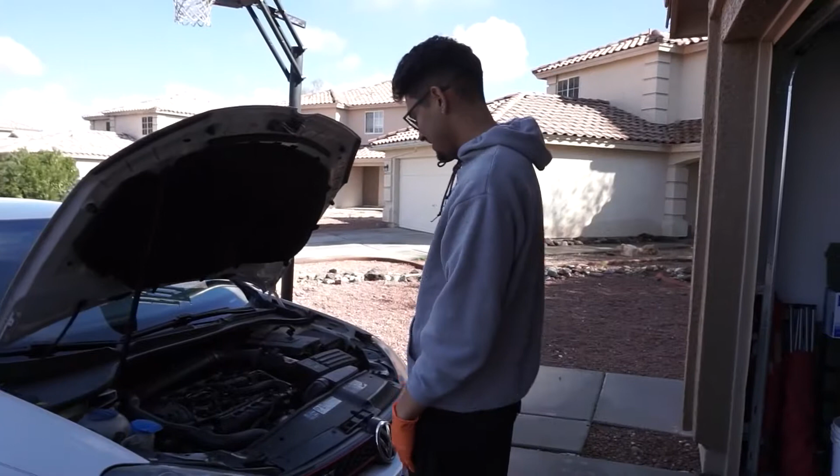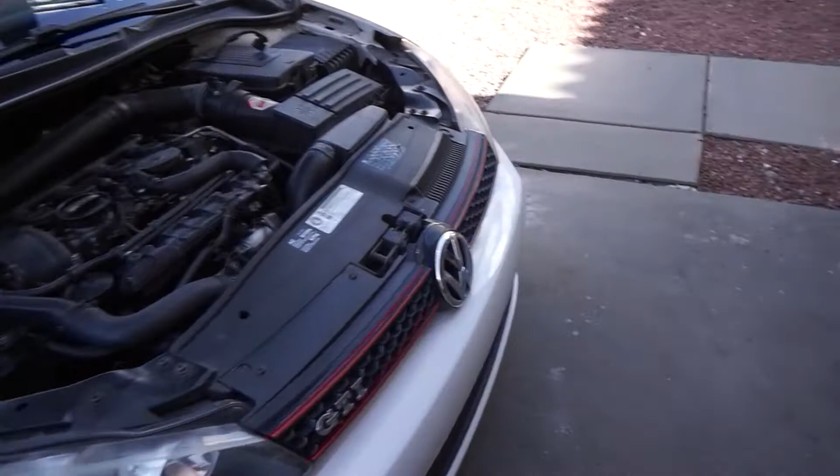You don't even know what car I have, bro. Oh shit. Let me show y'all. Alright, so he has a 2010 Mark 6 GTI 2.0. Tiene turbo dog? It has a small turbo right now. K04 coming soon. Hell no. Yeah, all stock, super clean, and really excited to be working on it today. Gang gang. All right, well, today we're gonna do his short shifter.

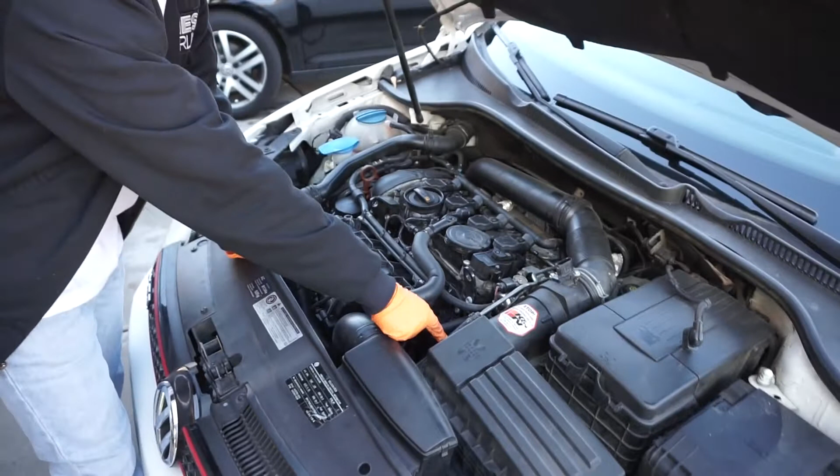We're gonna do a short shifter, which is right under here, and his diverter valve, which I don't know where it's at, but he knows, so I'll record him doing that. And so first thing you do is take off the cover, obviously, and then go ahead and take this intake box. There's a clamp right here, and there's an Allen key right here. And this whole thing just pops off, and I think you pop it off here too. I don't know. We'll find out. We have no instructions.

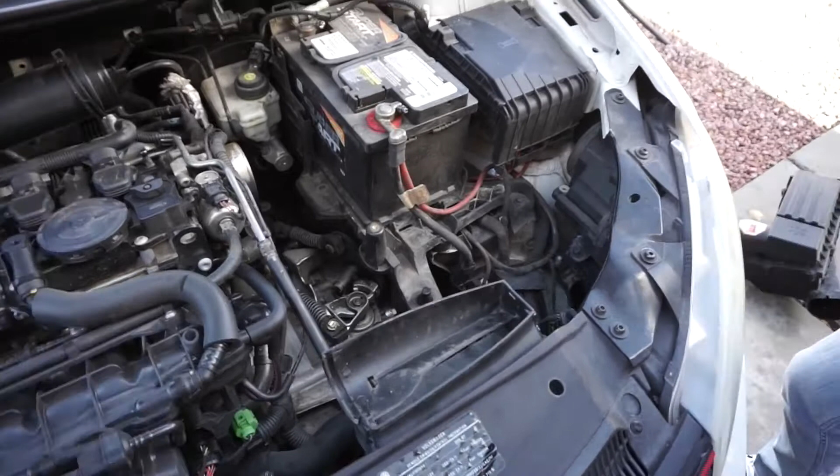Alright guys, so we took out the air box. Literally one bolt. This thing right here. I'm pretty sure there's more that's holding it because this one looks broken. So there's probably another one that holds it around here. And then you take off this cover right here from the intake, and then you just pop it off and pull it out. There's this part right here. We took out. And you just pull out that whole thing. Yeah. And then now you have access to your short shifter, which is all this assembly.

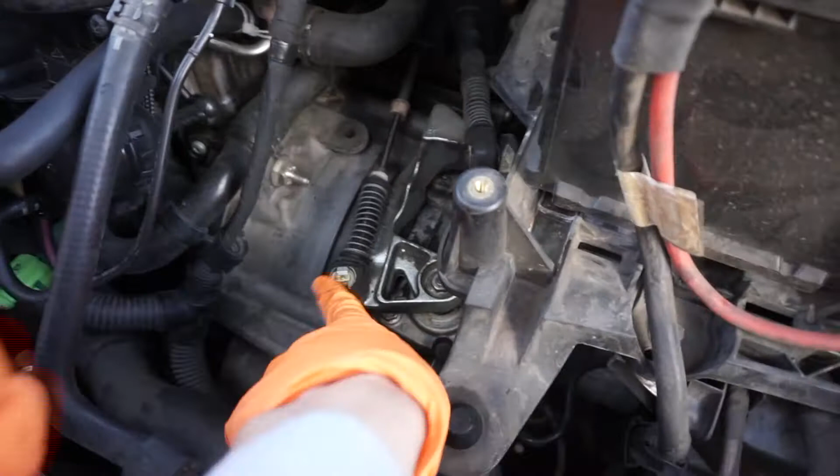So what you're gonna do is loosen this bolt nut up, and then you just take this clip off. There's another clip right here. You have to be careful. Don't break this. I heard it's pretty expensive. Yeah, I think so. Alright guys, first clip is off. And then took out this clip too. Super easy. It's like grabbing on both sides. You guys can see. Right there. Pretty easy ass clip. This one, I did it by hand.

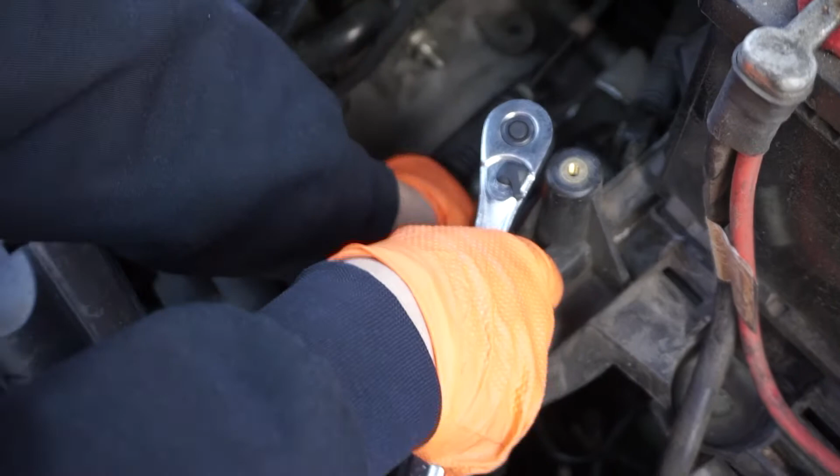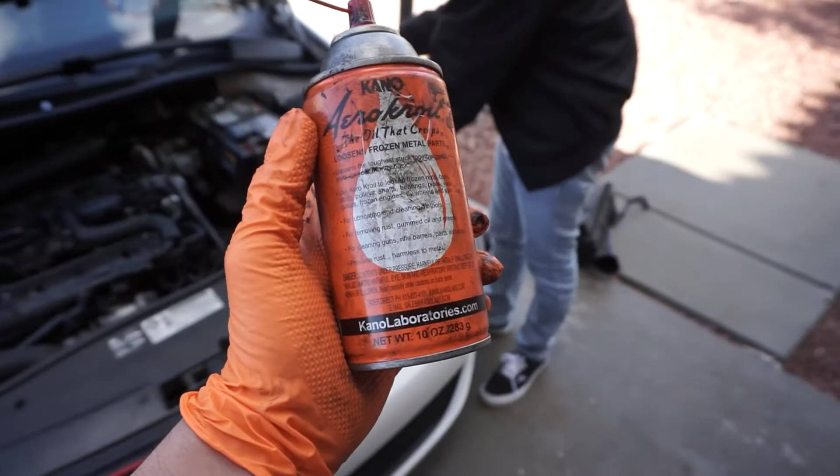Super easy. Shit, you're right, it was a 13, bro. Yeah. Alright, so it's not a 13 mil. Well, it's gonna mess up here. Yeah, this one was easy though. Wanna go put it back in neutral? I think I did actually, but go do it anyway. Alright. Pause the music. Alright, well, after a few pulls, it'll come out. Nigga, speak up. You're so scared. I'm not scared, nigga. I'm sick. We use this shit that Isaac uses on planes, so you know it's gonna come out easily. Hey, never mind. But yeah, we got it out.

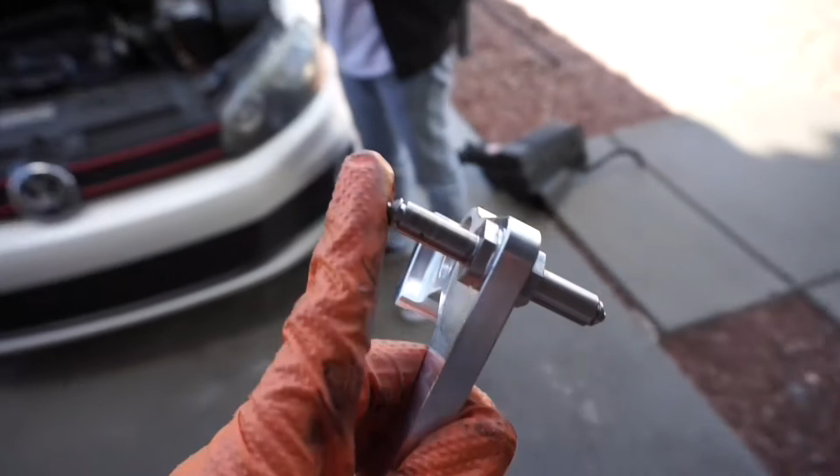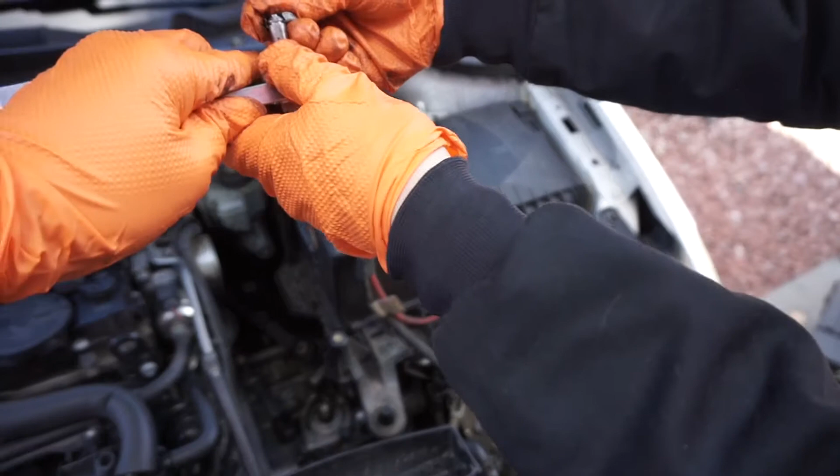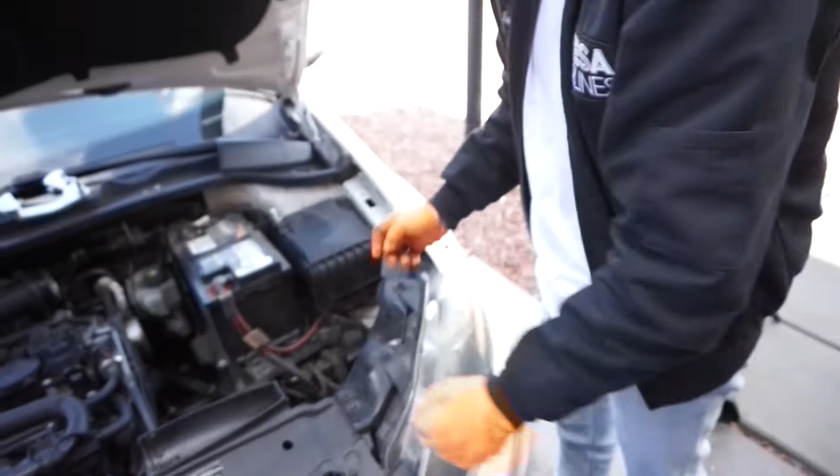With the short shifter, it comes with two sizes. You have the skinnier one, and then the fatter one. Oh, it matters. It's right there, so we can check which one it is. Yeah, it's that one. This one? Yeah. Okay. Yeah, but make sure which before you install. They're all different sizes. I don't really know. Maybe DSG is different. Maybe. I mean, they still have shifter linkages. Yeah, true. So maybe one's for DSG. But it was super easy, to be honest. Literally a couple pulls and we got it out. But now I would just use some WD-40 or something to loosen it up.

Yeah. Now we're just gonna install the new one. Did you show them how it looks? Yeah. This is where you're gonna install it. And you make sure to leave it in neutral, just so you don't have to adjust it a whole lot. Because if not, you're gonna be adjusting these rods for a minute. Isaac's pretty good at it though. Yeah.

But yeah. So on the short shifter, there's two options. You can do the very, very short, or I think this one's like 20% and 40%. So we're gonna go with the most aggressive, cause you know. What are you gonna do? The most aggressive? Yeah, fucking nigga. We're gonna go big or go home. There you go. Alright. You just loosen it up, put it. Yeah. We'll keep y'all updated.

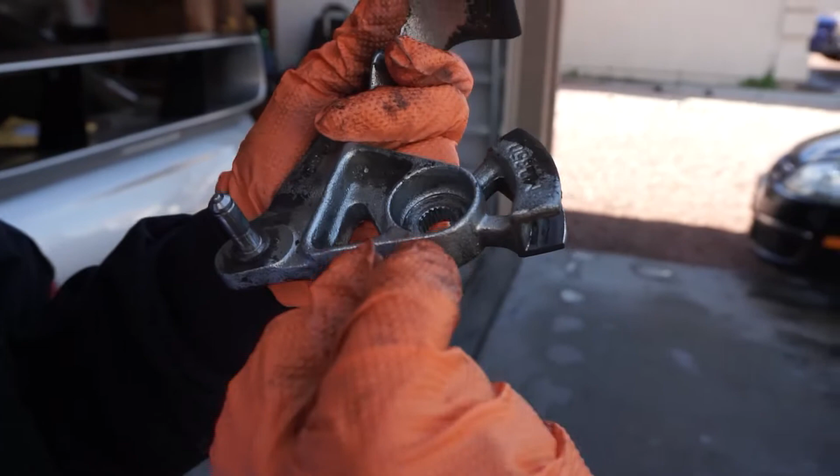Go ahead. All right. So when you install the new one, this is kind of dirty, but there's like a flat spot, kind of like right here, because this thing will only go on one way. So don't just try to jam it in there. Yeah, you're gonna fuck it up. Yeah. So like right here, there's like a few teeth missing, and it's supposed to be like that. It's kind of keyed, so you don't mess it up or put it on wrong. Yeah. We got it in. Just pay attention, because if you fuck it up, I'm sure it's gonna be expensive.

Yeah. The fucking Volkswagen. The fucking splines on the transmission. Yeah, now we're just tightening everything up. Since you have a short shifter now, I don't know if you're gonna need to adjust these. Maybe not. No, it'll be fine. But if we do, I'll show you how to do it. Well, it's not hard. You just pull these back, and then the rod will come in or out. It's fucking weird. It took us like a good 3 hours to figure out. Oh yeah, last time when you were in. My fucking shifter was crooked as hell. Where's this one go? Oh yeah, it goes right here.

But yeah, we'll keep y'all updated. All right, Carlos is gonna show you. It's completely installed. That clip's back on. This clip is missing, but that clip's back on. Everything's tight. Now he's gonna show you the after. We should have showed y'all before, but if you own a GTI, you know this shit. These shits are like semis. All right, show him.

Oh yeah, that's fucking good. Is that good? Does it feel a little weird? No, it feels good. Are you sure it doesn't need adjustment? No, it's good. Nah, it's good. All right, show him real quick. First, second, third, fourth, fifth, sixth. What about reverse? God damn. Feels good, bro. You're probably even short shifting on reverse.

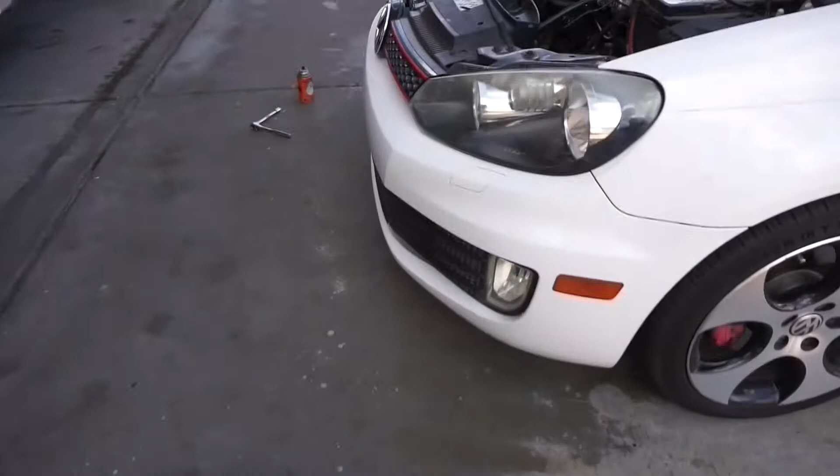Bro, that install was easily like 10 minutes. Yeah, it wasn't bad literally at all. So now we're gonna put all this back together. Well, now we're gonna install his diverter valve. It's a two-for-one special here today.

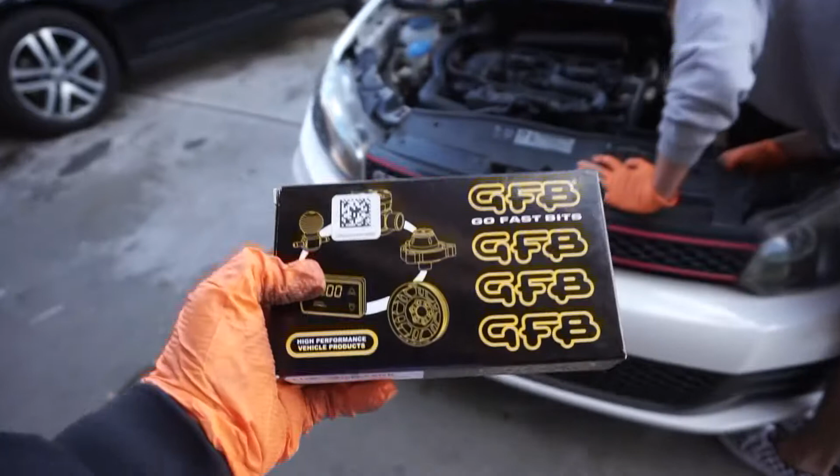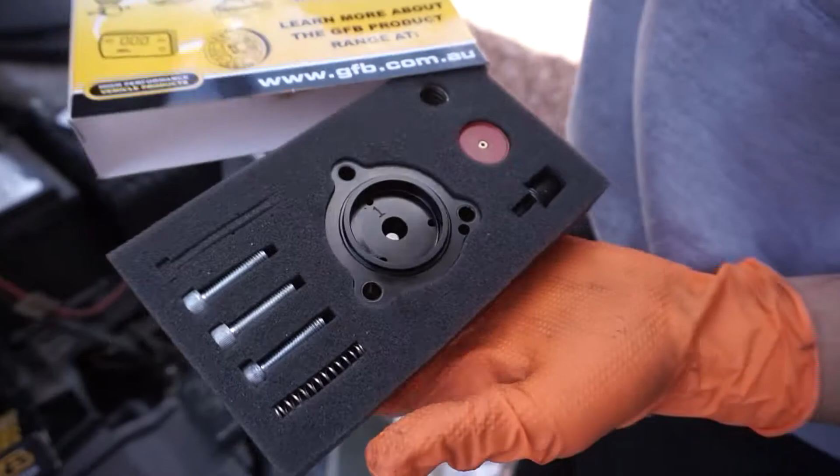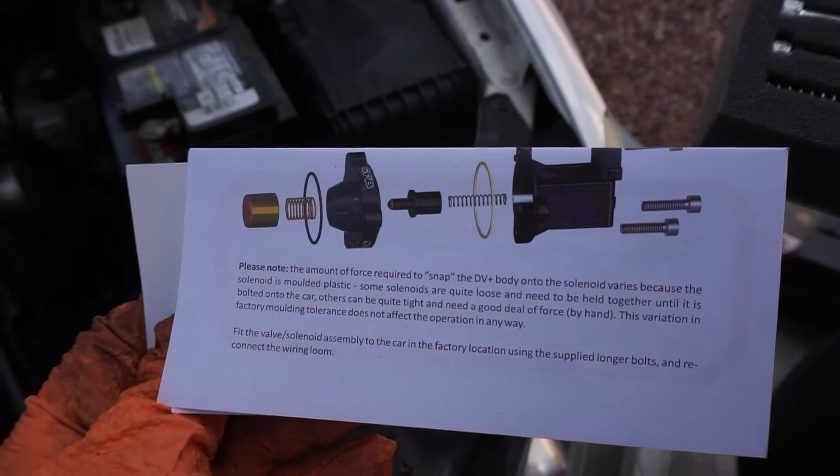Alright, so now we're installing this. This is Go Fast Bits diverter valve. I don't really know how to install this. Me either. Carlos looked at a video of it. Looks pretty cool. Came with the sticker. You know, we ain't rich, so we ain't buying new parts. It's a good ass deal. It's like a Rolex. Well, we'll show you kind of. Here's the picture of how it goes. So that's how it's gonna go. We'll show y'all, because we don't know much about this.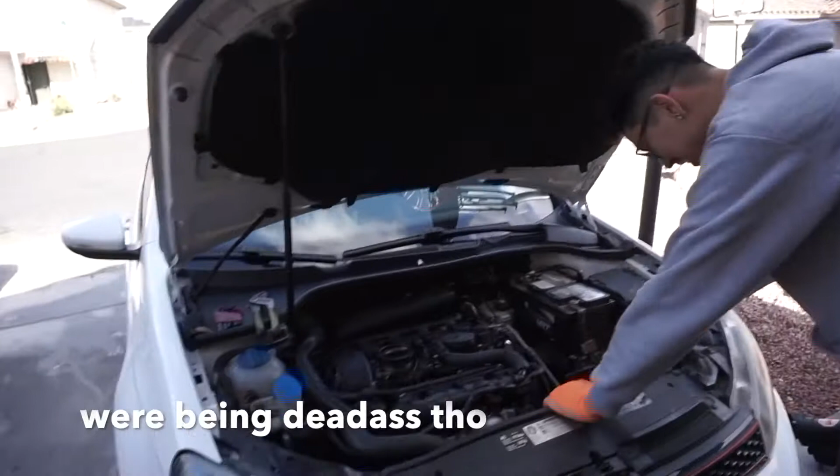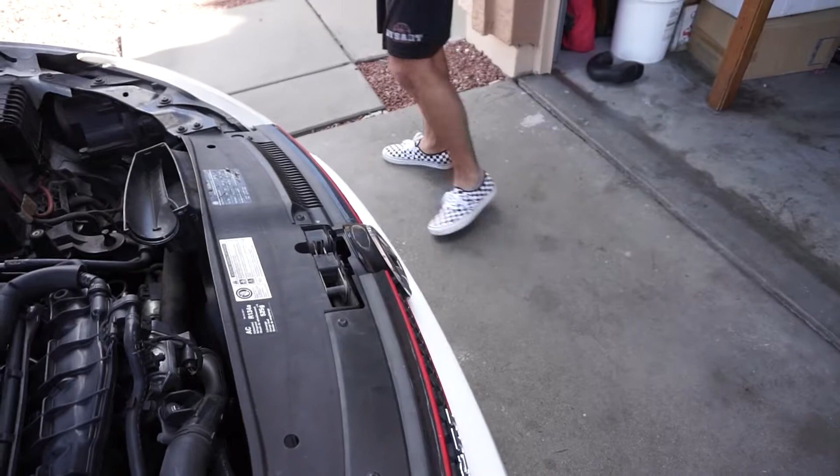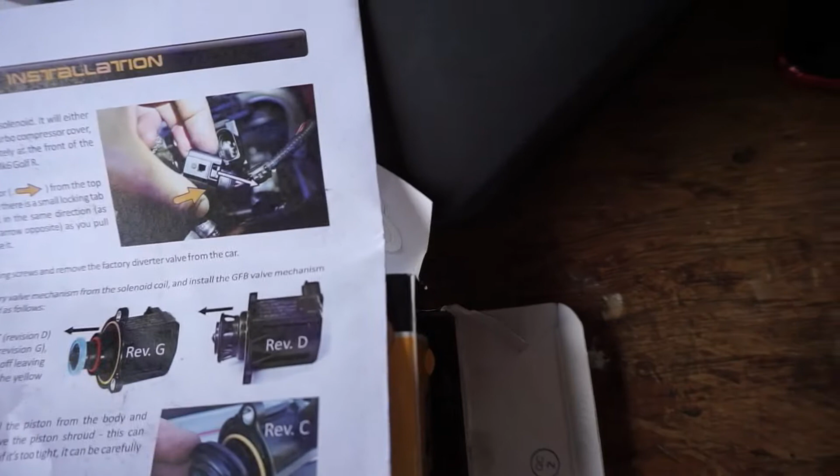Alright, guys. We'll show you. This is down there. He's taking off the diverter valve. These are the bolts. Sorry, there's a fucking plane passing right now. This is also a 5mm Allen key. The new one's over here. And as you can see, they told you to unclip that. Shit, it's not focusing. So you unclip this clip, take off those 2 bolts, and then I think you just pull it out. And then we'll show y'all how to put the new stuff in.

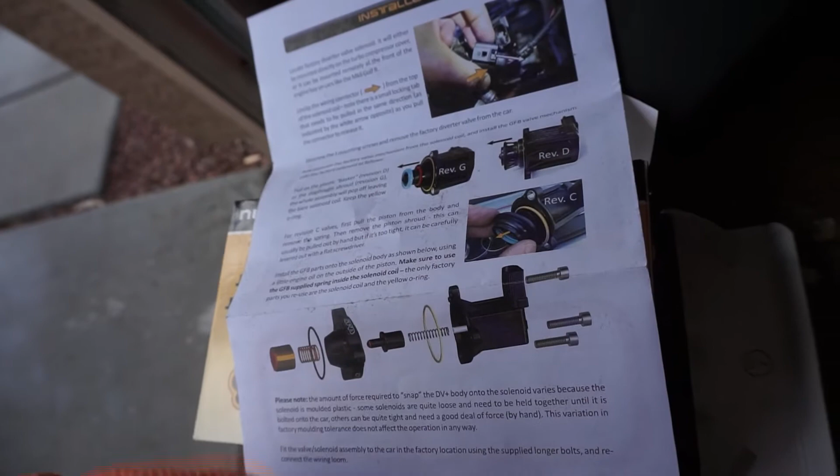You reuse the housing, but that's it. Yeah, everything else you change. Alright, we'll show you right now.

Man, Carlos thick as fuck. I'm about to. Oh shit.

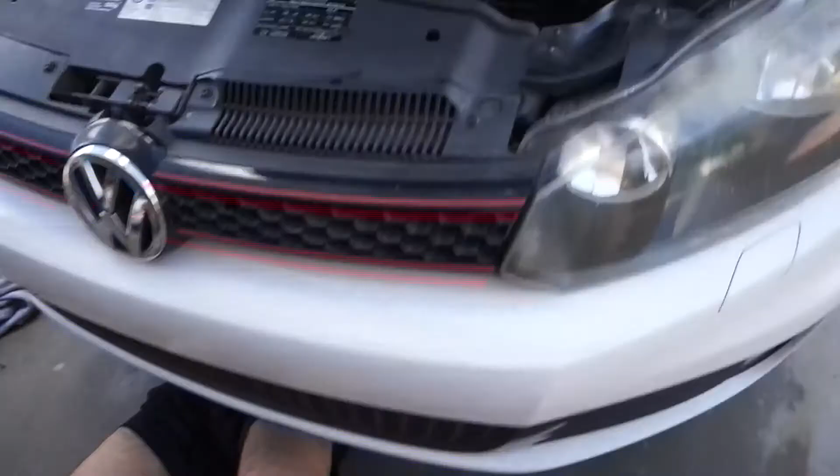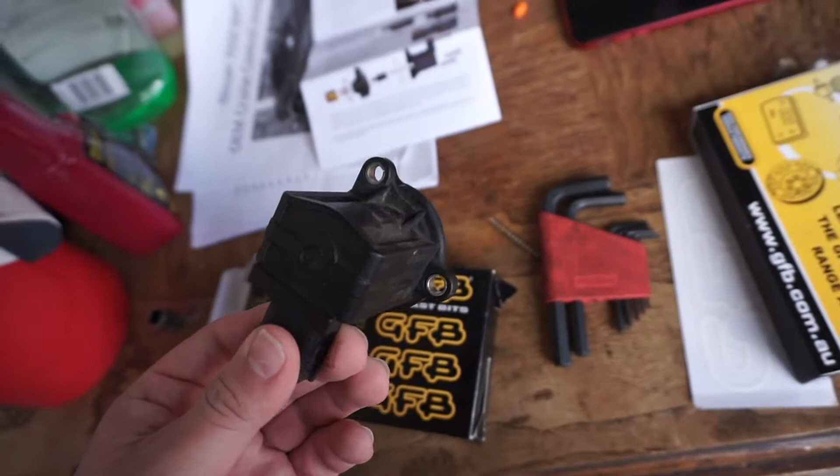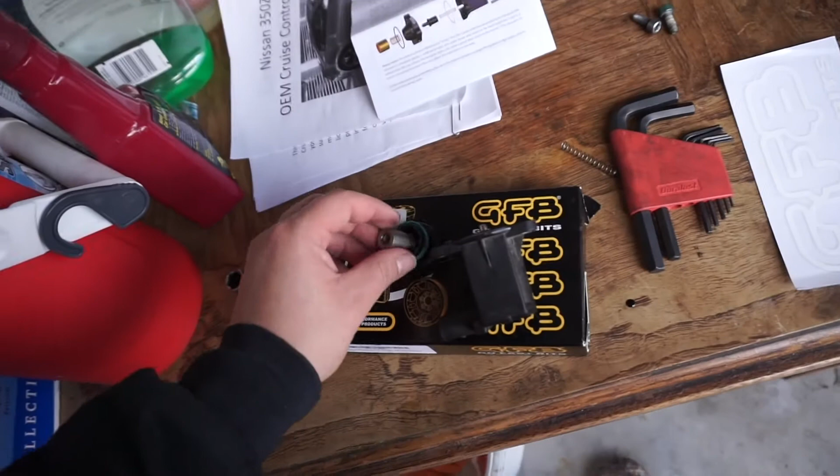Alright. Carlos will show y'all in a little. This is sick. Alright. We finally got it out. It was kind of a pain in the ass. The 2 bottom ones are fine, it's a 5mm, but the top one's really hard. We had to use an Allen key and then grab it with some pliers to loosen it, to get some leverage. And then all this came out from the old one. And the spring. So this is the new one. And it gives you some instructions here on how to put it back together.

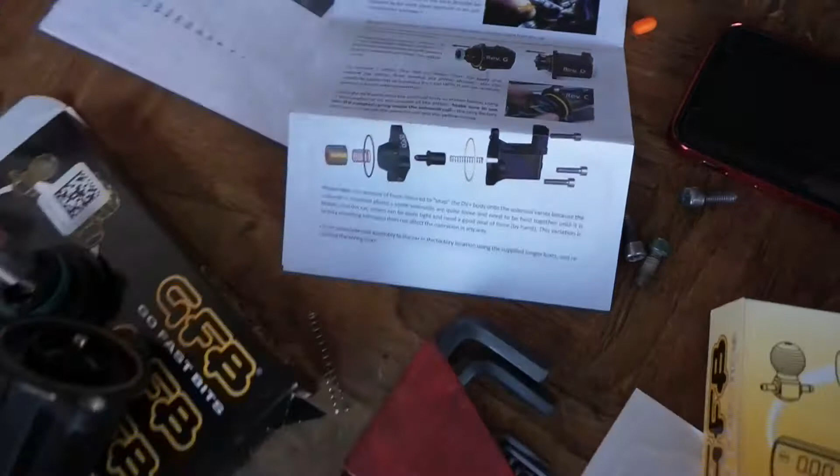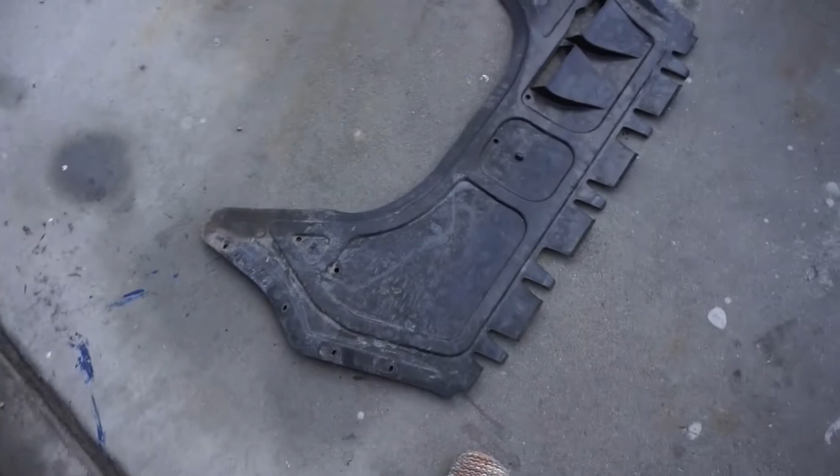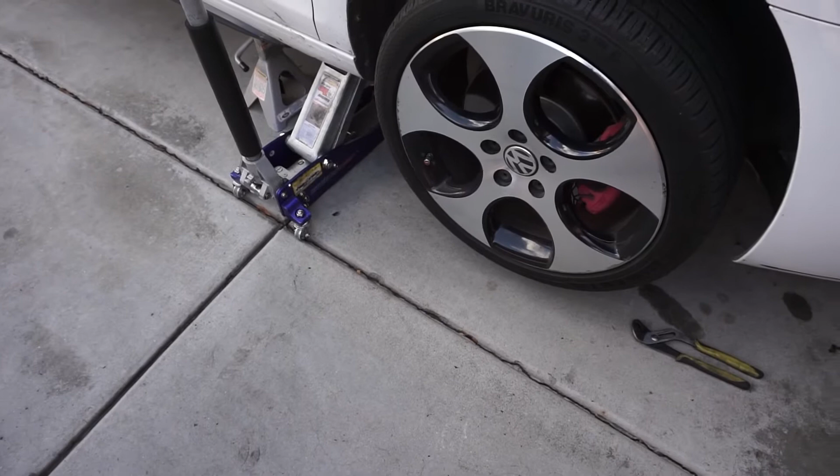So you take off this first, which is a Torx bit screw, like a T20 or something. Take them all off. Then you slide it out, and make sure you jack up your car. Well, yeah, you pretty much have to jack up your car to get to it.

Spring, right? Spring has the O-ring already. This part? No, this part right here. No, wait, no. Oh yeah, you're right. Where does this go? Where does that go? Maybe it replaces it. Wait, that goes right here. Look, goes at the very end. At the end? Oh yeah, it does. Like this? Yeah. Oh yeah, it is a spring.

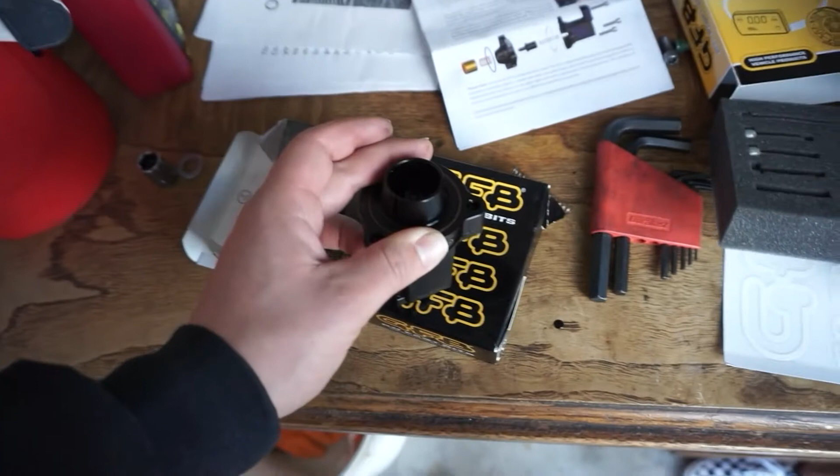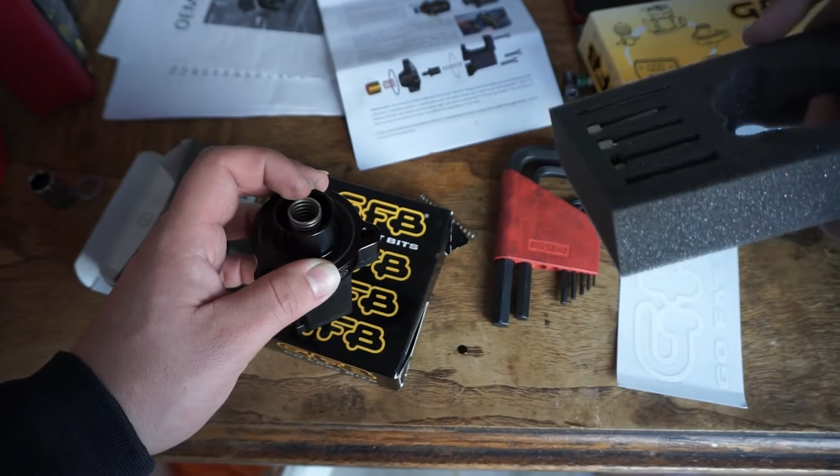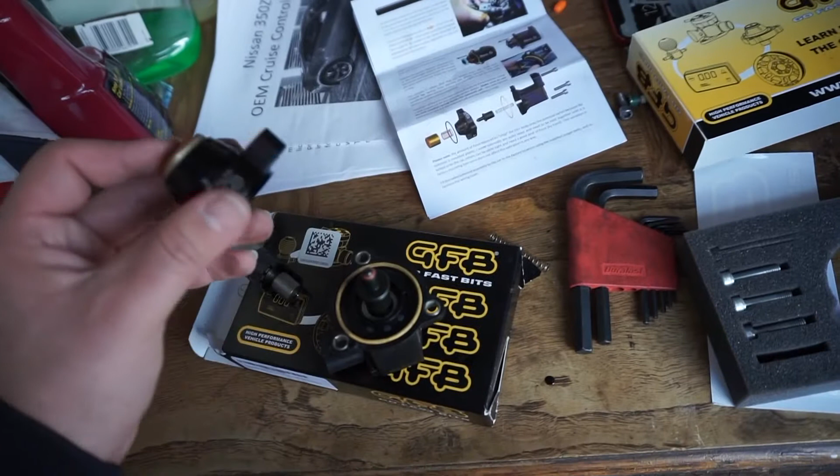What's that? Oh, this is the gasket? Yeah, the gasket's on there, and there's that spring, and then you put that. Oh, okay. All right, so let's show them real quick. And that goes on top. Look at the picture, this other picture right there. You see it? Alright, so anyways, you put that little spring.

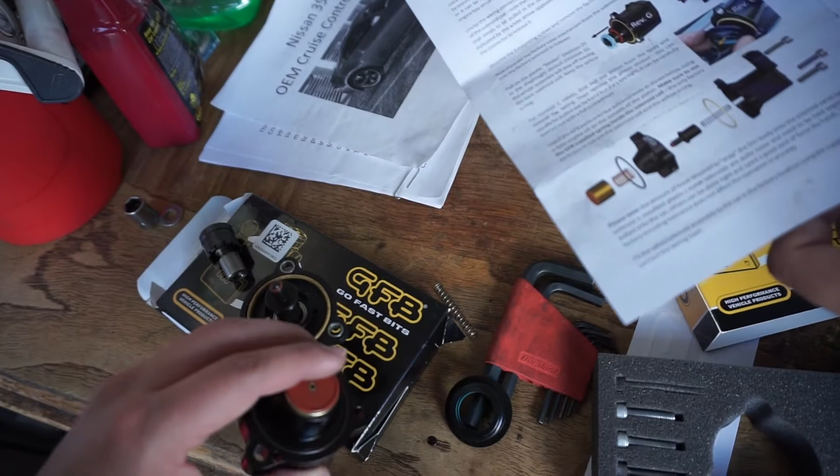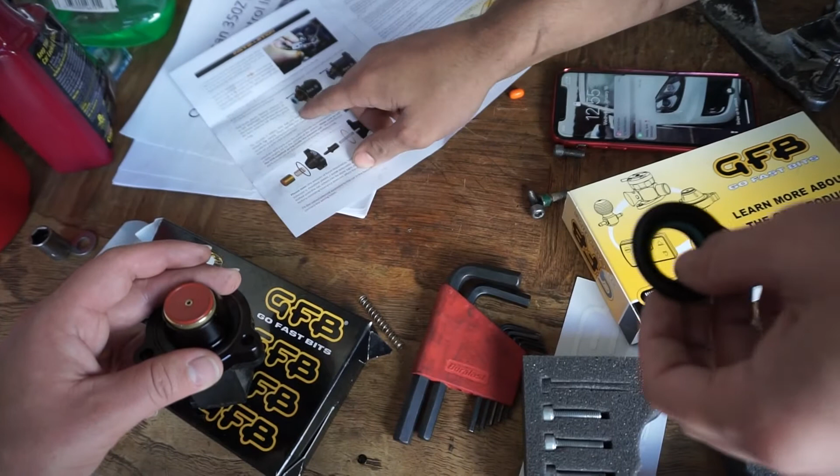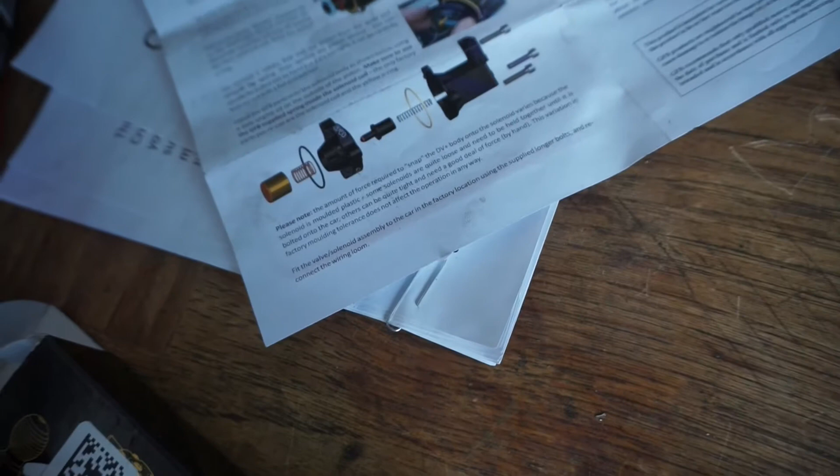The only factory parts you reuse are the solenoid coil and the yellow O-ring. Yellow O-ring, solenoid coil. Is this it? Yellow O-ring's right here, and the solenoid coil is in there. Alright, so we don't need this then? Is that a factory part? Yeah. Oh, that's showing you how it comes factory, because look, it doesn't have this. Yeah, you're right. So we don't need it then? Okay, cool. Because look, it would show us right here.

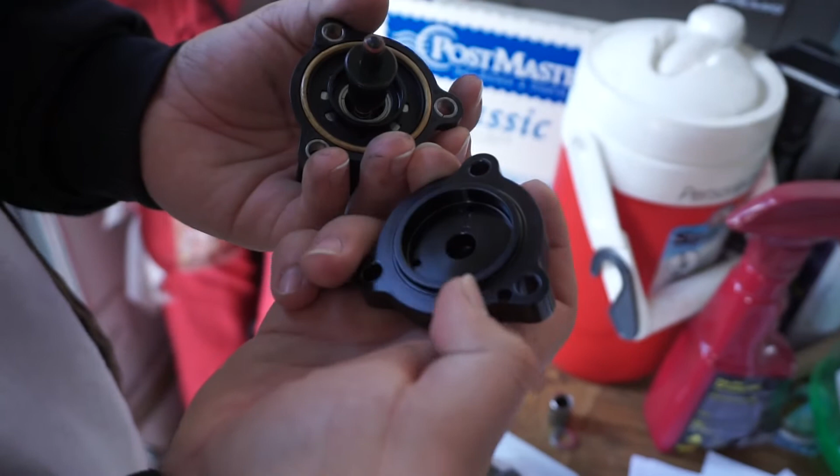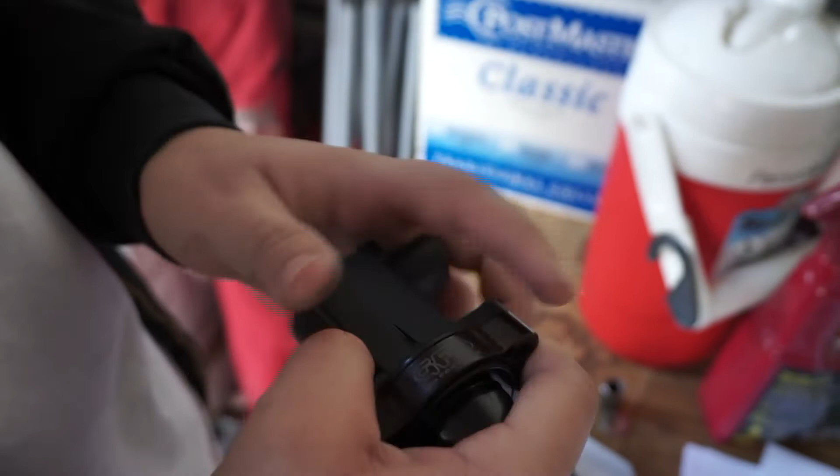He said it has to snap in. Alright, so this only goes on one way. You can see right here, there's a little hole. There's a little tab right here. So it's keyed, so you can put it on only one way. 'Cause if you don't do that, pretty sure you'll have a boost leak. Okay, and they said you kind of have to just hold it and put it on, because some of them are just old and they're not as tight as they used to be.

Yeah. Pussy's loose. Hold on. Let me put my gloves back on. Let me put it back on.

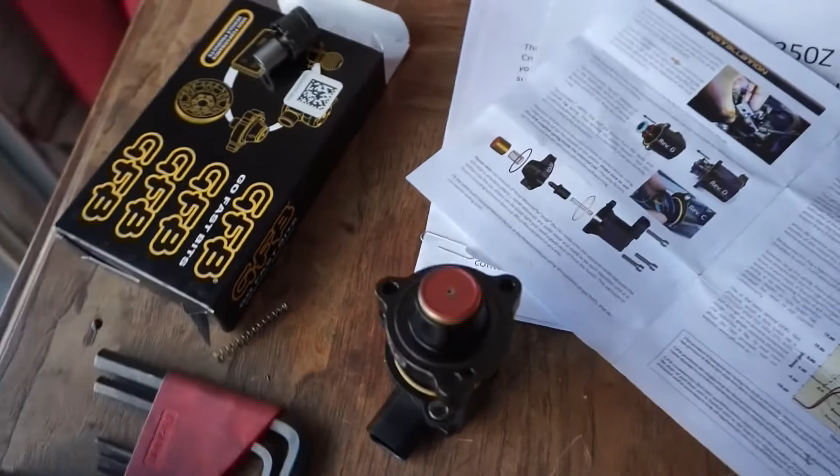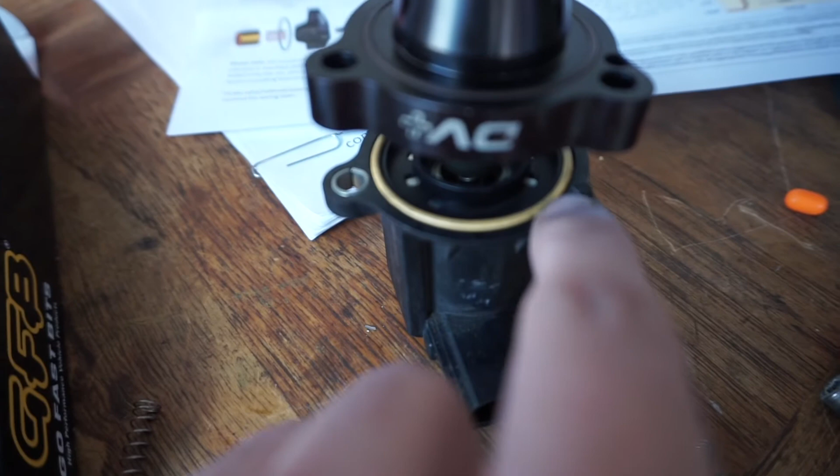So if you guys didn't know what he was talking about, it's a hole right here, and then there's a little thing right there, so you don't mix it up. Looks pretty dope. And make sure you put all the O-rings back and all that good stuff, because if not, you'll definitely be boosting wrong, or won't boost.

So these are the new ones right here, guys. Make sure you use these, because then it won't go back on. These are longer because of the spacing right here. You can tell. I was like, oh, don't mix them up. Alright, time to put it on.

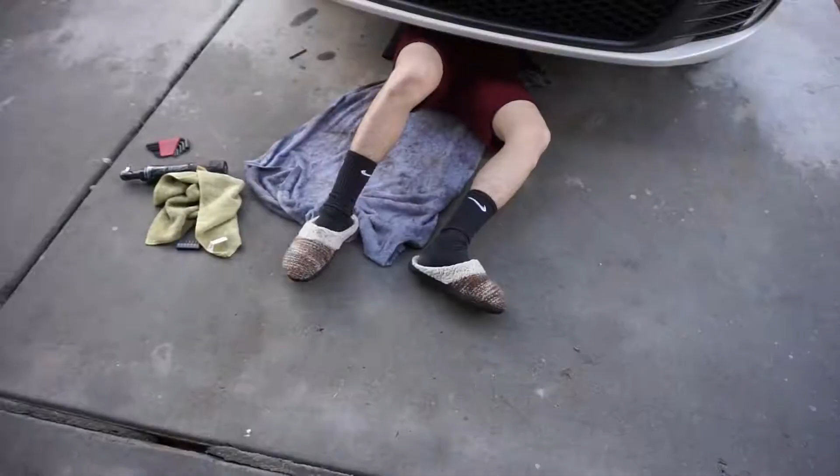Oh yeah. Round two. Oh hell no. Those are shoes on. Bring the camera so I can show it. Oh hell no. Nah, you're recording? Nah. Fuck you.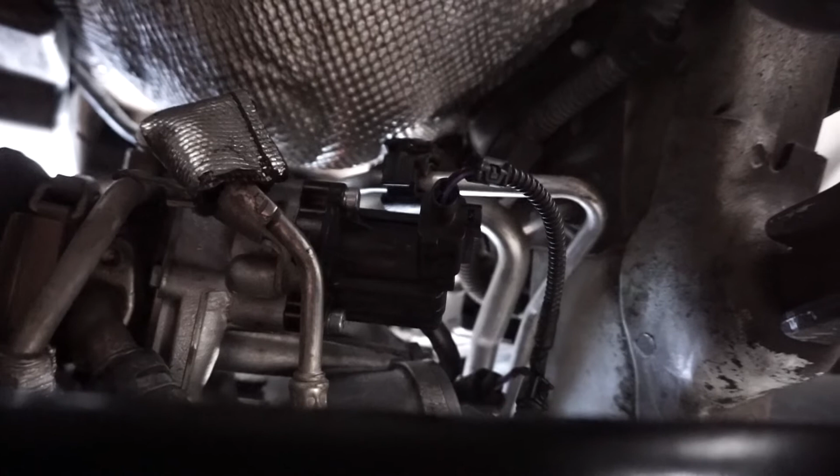Alright, let me show you where the diverter valve's at. It's right there. This is a new one installed, but if you can see, there's 2 bolts on the bottom, 1 at the top. I can't show you the top one because it's a bitch; you can't see it from up here. And then there's a little locking tab on that connector, so don't just pull on it. You gotta push the locking tab in and then pull on it. But yeah, that's about it.

It's already installed. We'll show you guys how it sounds right now. I think it's not gonna sound any different. Alright, well, we'll see. Sounds like shit. Boost leak.

Alright, so that was it on this install. It was the diverter valve and the short shifter.

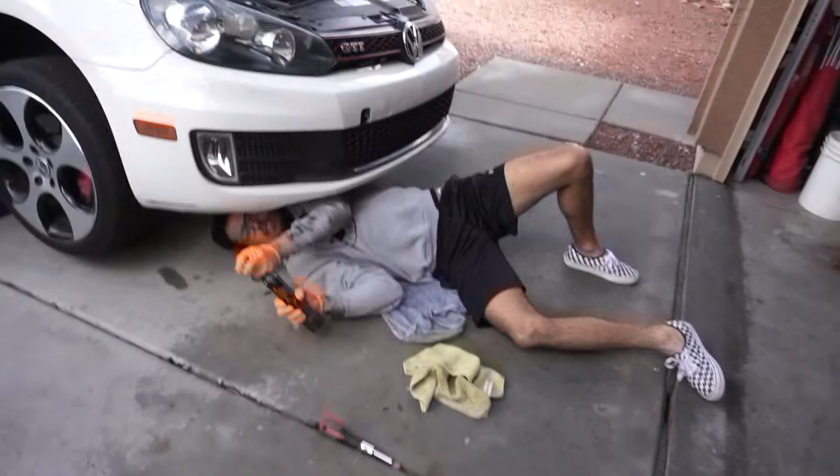I might just put sound clips of how his car's gonna sound now, instead of doing a whole video about it, at the end. I'm doing exhaust too. Yeah, I know. We're doing a resonator delete, so I might just put those clips at the end and show y'all the before and after. But that's about it. I'm not gonna go into full detail about it.

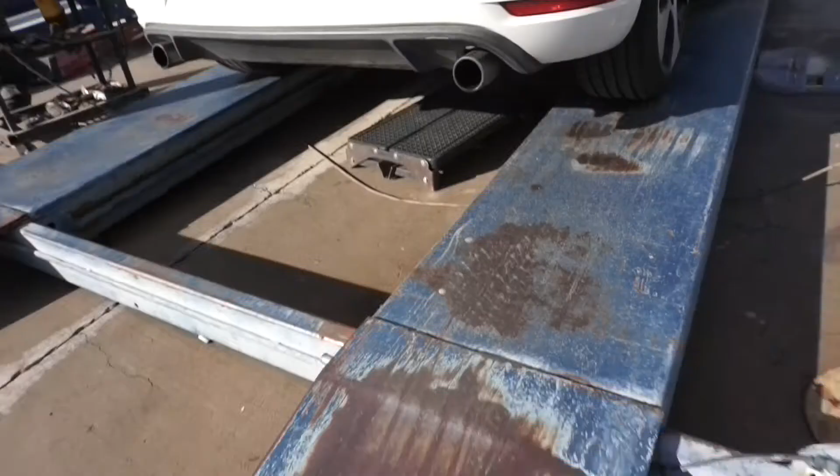Rev it up a little. Alright, this is Carlos's exhaust after the resonator delete.